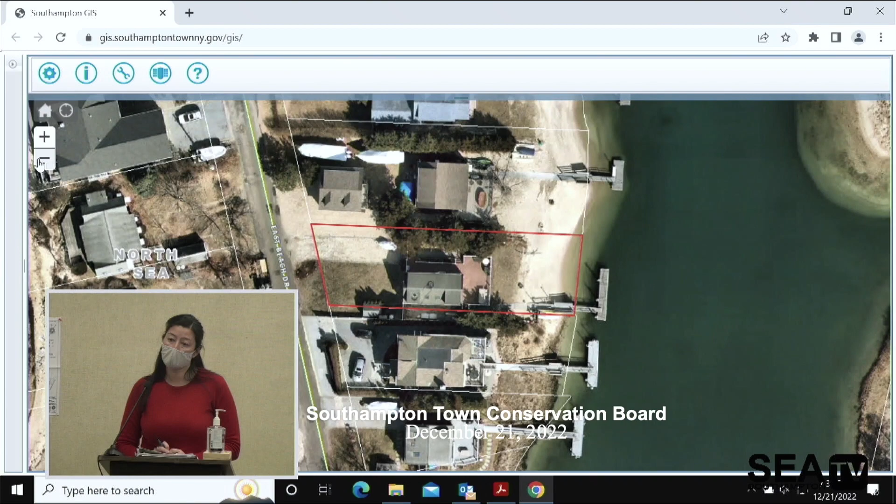How much is the expanded floor coverage? They're nearly doubling the size of the home because it's a second-story addition. They're going from 700 to 1,000.

So you're only asking -- well, let me just double check that. I think that's the footprint. So a 700 square foot footprint, and then 1,044 for the new footprint. So it's 2 stories, it'll be 2,000 square feet.

And just so you're aware, that is 40 feet from the wetlands, where 100 feet is required.

Ms. Clark, if you have questions, you can ask them. Can you hear us, Ms. Clark? Turn your volume up, you have to unmute yourself, Ms. Clark. Do you have any questions, Ms. Clark? She might not be able to hear. Maybe if you come closer to the microphone. Do you have any questions? The mics are on. Mike, can you unmute yourself? I think I heard her husband. I think her husband's on the phone with Karina. Just give her a moment. She's talking to you, Karina. Did she ever say what she previously planted that time?

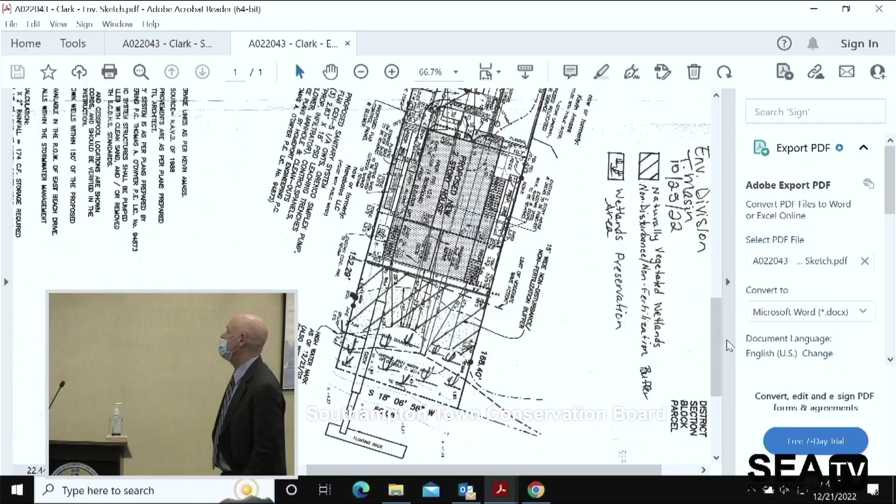Ms. Clark, hearing your concerns, we can certainly look to reconfigure the buffer so it's a straight 20 feet, so that it doesn't cut straight across your entire yard, and so that it's parallel to the existing wetland boundary. But understand the code looks for much larger naturally vegetated buffers, and where you have a constrained lot like this, we are required to work with you to maximize the buffer. As indicated, this is a complete redevelopment plan, and the new home that would be built is bigger than the existing home. So when we get an application like that, the code directs us to try and expand the buffer to offset the impacts of that additional construction.

I would just mention to you that virtually every waterfront property that comes before us, the permits that we issue for construction are conditioned upon recording of a covenant describing that buffer. In your case, you have an existing covenant, so you would simply have to amend that covenant to reference the expanded buffer, and we have a template for that. We have instructions. Both my office and the town attorney's office will get you through that process as easily as we can. But what we're asking you to do is the same thing we ask all waterfront properties to do when they come before us.

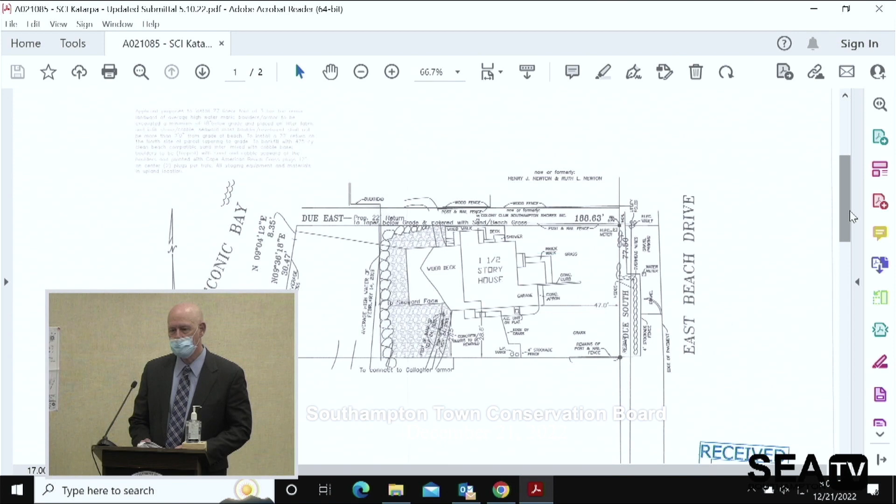The applicant is seeking a wetlands permit because notwithstanding the renourishment, they want to gain approval to install stone armor along the shoreline of the property. This is an application for which we need significant additional information to make a determination. As such, I'm recommending that a hearing be held.

Motion to have public hearing? Do we have a date? Yes, February 8th. Okay. Do I have a second? Second. Therefore be it resolved that the Town Conservation Board hereby schedules a public hearing for February 8th, 2023, and that a notice of public hearing be published in the town designated newspaper pursuant to Chapter 325, Section 325, 8C of the Town Code.

A022012, Duretti Fufa, and they are requesting a postponement to January 11th, 2023. Motion to postpone to January 11th? Second? All in favor? Aye. Opposed?

A022061, Marcella Silverman and Forster Mayer. This application relates to an existing residentially developed flag lot that takes access off of the west side of Major's Path in the hamlet of North Sea. There is a preliminary advisory report on file dated December 19, 2022.

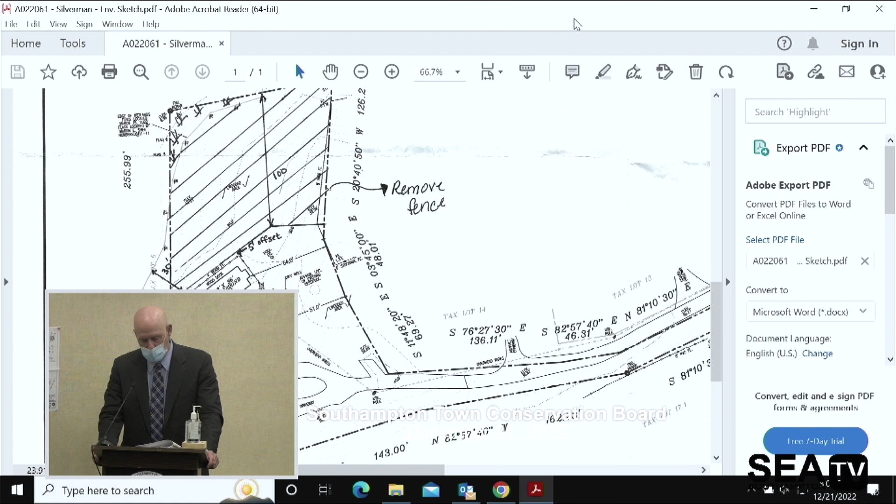Those accessory improvements include installation of an elevated pool and pool deck along with a hot tub. The basement was converted to living area. There are various wood entry improvements that need to be addressed, as well as a framed outdoor shower shed and driveway reconfiguration.

The residence and pool is situated fairly high above the wetlands. Immediately beyond the pool deck, you have forested land that descends rapidly to freshwater wetlands consisting of a red maple swamp that are associated with Little Fresh Pond.

In order to offset the impacts of the construction, we have provided a sketch to the applicant showing a recommended covenanted wetland preservation area, naturally vegetated buffer, which the applicant has agreed to. We have asked that a fence along the eastern side of the property be removed, and the elevated pool and deck at present does not benefit by a code compliant pool enclosure fence.

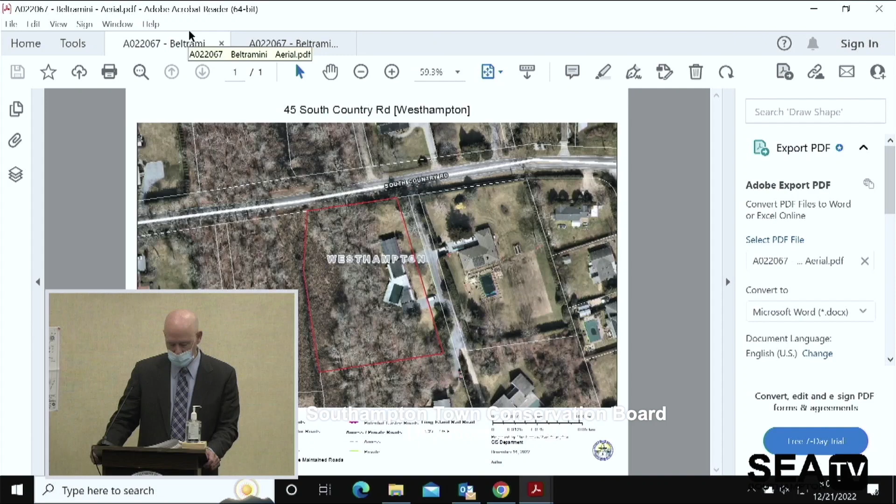A022067, Antonio Beltramini and Anne Louise Lippman Beltramini. This application relates to an existing residentially developed property on the south side of South Country Road in the hamlet of Westhampton. There is a preliminary advisory report on file dated December 13, 2022. As indicated by the aerial photograph on the screen, the property is marked by very extensive wooded wetlands and a creek on the western portion of the parcel.

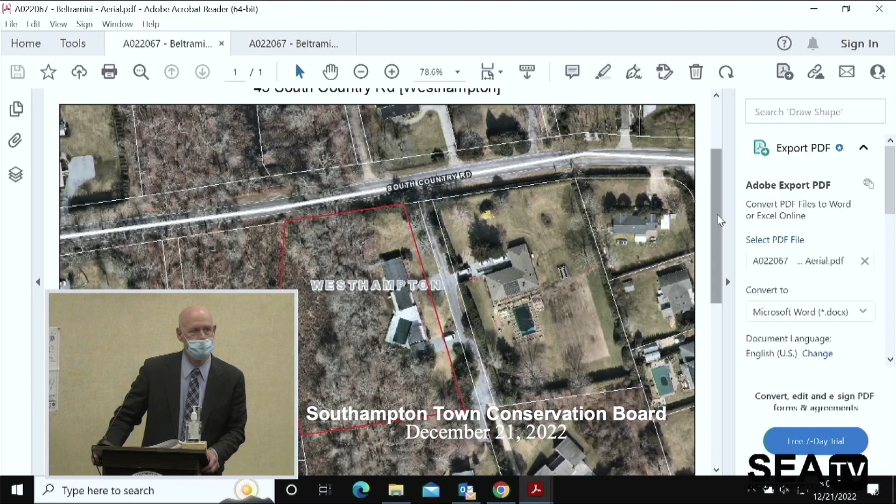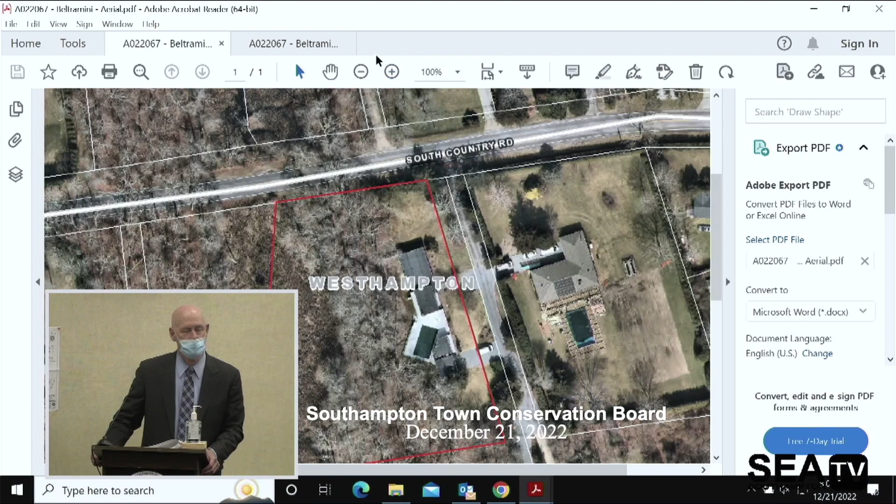The application was made because a stop work order and notice of violation were issued, as the landowner had commenced construction of replacement of the pool deck with an elevated patio. Upon visiting the property, we also found that there were unauthorized retaining walls immediately west of the residence and pool deck that needed to be addressed as well. There had been a former pre-existing wood tie wall along the outer periphery of the pool deck, but the wall had been reconfigured in subsequent years such that it's right up against the wetland boundary.

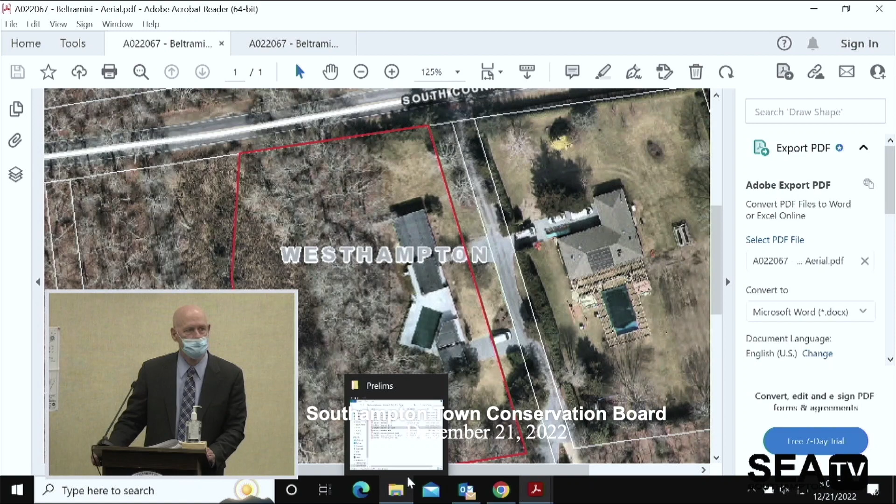I have asked that the applicant remove the northerly retaining walls, and there's a small rock-lined ornamental pond which they've agreed to. As far as the southerly unauthorized retaining wall, I have asked that they shift that to the immediate periphery of the elevated pool patio, which they've also agreed to. I've asked that the patio be constructed as a pervious patio to allow for immediate rainwater infiltration, thereby negating the need for installation of drywells.

I also provided a sketch of a recommended buffer for the property, which the applicant has agreed to in concept. I did work with the applicant on some minor refinements to that buffer to afford better access around the periphery of the house. And the applicant is looking to reforest portions of the buffer that are being maintained as lawn.

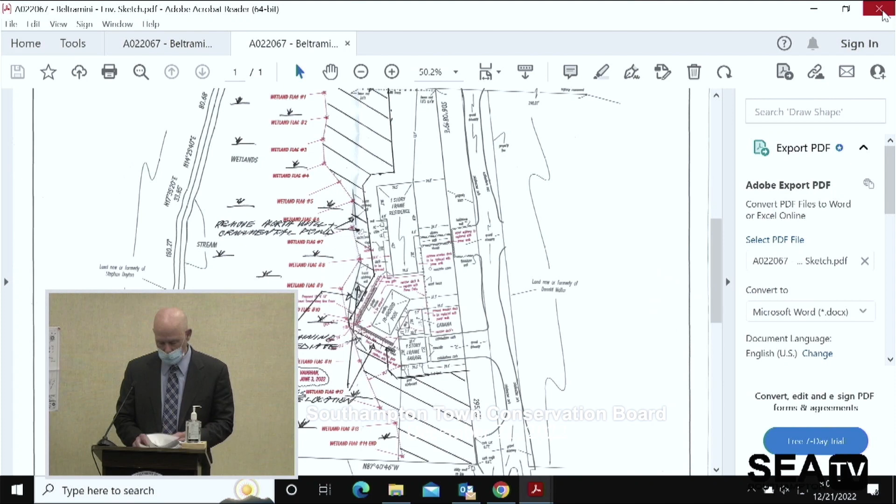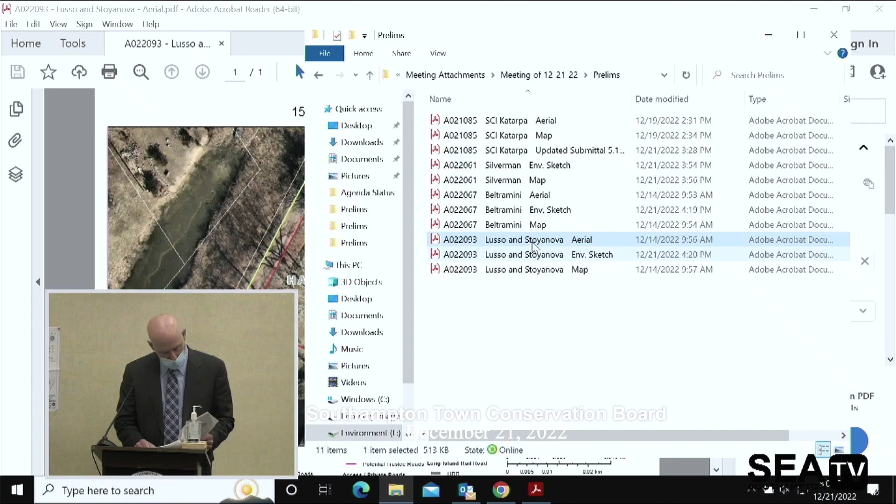A022093, Andrea Lusso and Maria Stoyanova. This application relates to a residentially developed property in the Old Harbor Colony community in Hampton Bays. The application has been made in order to gain this board's approval to construct a swimming pool that would necessitate removal of an existing deck and reconfiguration of patios. They have provided a concept plan for an expanded naturally vegetated wetland non-disturbance, non-fertilization buffer.

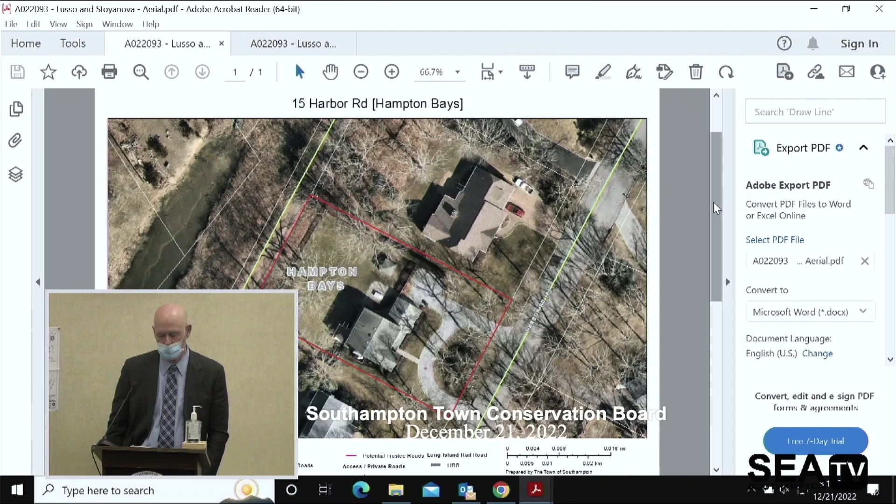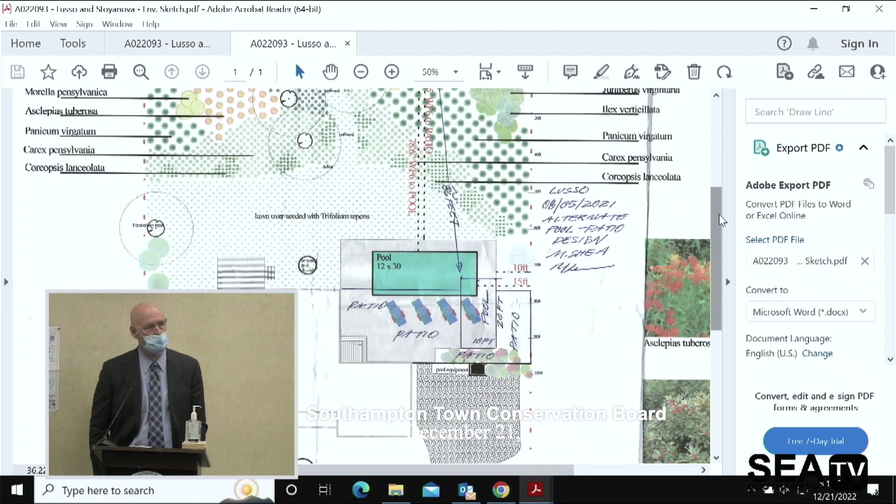Virtually the same application had previously been made to this board. At least a couple of years ago, the application was withdrawn. In the interim, I have been working closely with the applicant on redesign of the project plans. However, at this time, we're not in full agreement as to where that pool should be built. The buffer concept and revegetation plan otherwise looks acceptable. So this is an application for which additional information is needed in order to make a determination.

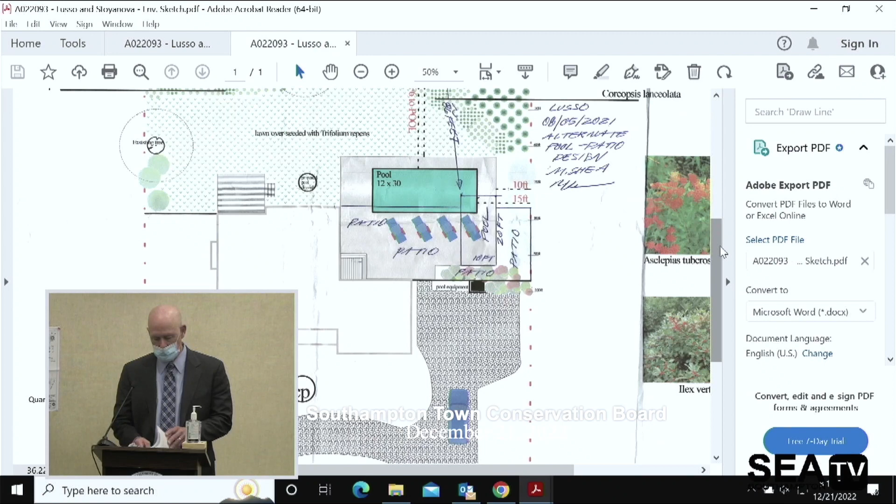As such, recommending that a public hearing be held. Motion for public hearing? Second? All in favor? Aye. Opposed? Therefore be it resolved that the Town Conservation Board hereby schedules a public hearing for February 8th, 2023, and that a notice of public hearing be published in the town designated newspaper pursuant to Chapter 325, Section 325-8C of the Town Code.

The next is a covenant interpretation or amendment, A022095, 91 Cobb Isle LLC, and the applicant is requesting a postponement to January 11th, 2023.

Motion to postpone to January... You said 22, I think. Did I say 22? I did? They say you did. That's what I thought I said, was 23, but maybe... I thought I said 23. Let's motion to postpone, apologize, January 2023. Do I have a second? Second. All in favor? Aye.

Opposed? Okay. Our next Conservation Board meeting will be Wednesday, January 11th, 2023. See you guys next...